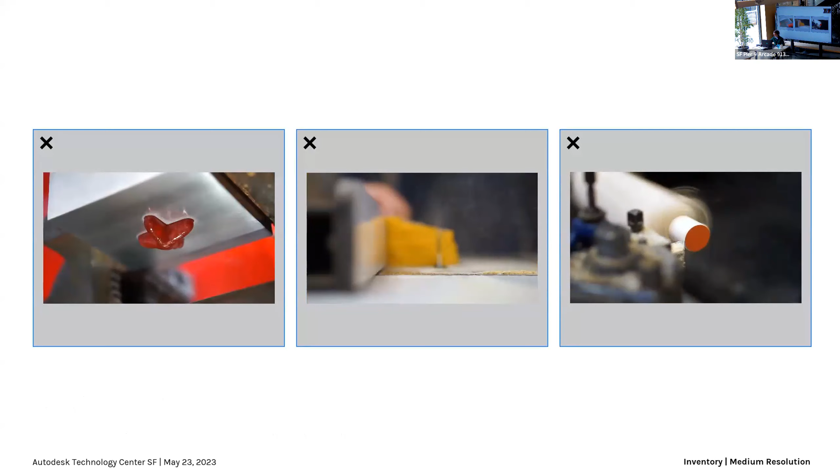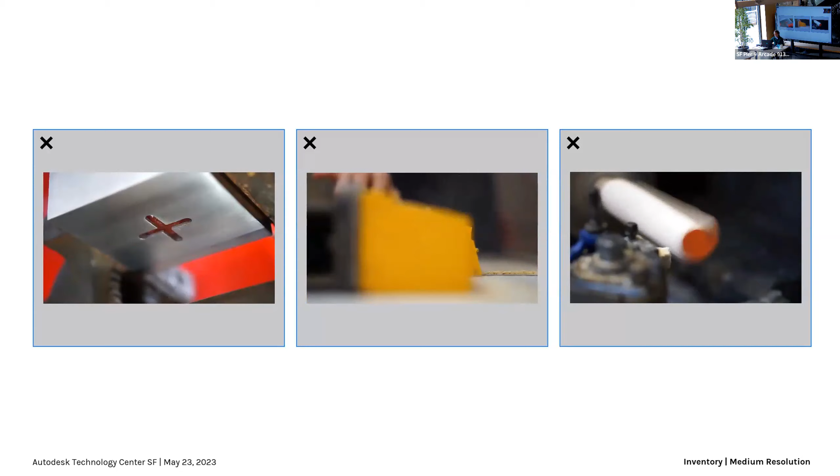Extrude, saw, turn, repeat. During the Industrial Revolution, machines and techniques were invented and advanced for forming materials into standardized shapes. This would lead to the development of the industrially mass-produced standardized building materials used today and left an indelible mark on architectural thought. The architecture of modernism, especially the international style, embodied the logic and efficiency of the factory.

While the endless linear and rotational processes of industrial production were quite literally imprinted on its geometries, to an unprecedented degree architecture became a practice of blind trust in superficially dimensioned materials, meaning standardized materials, specified from afar.

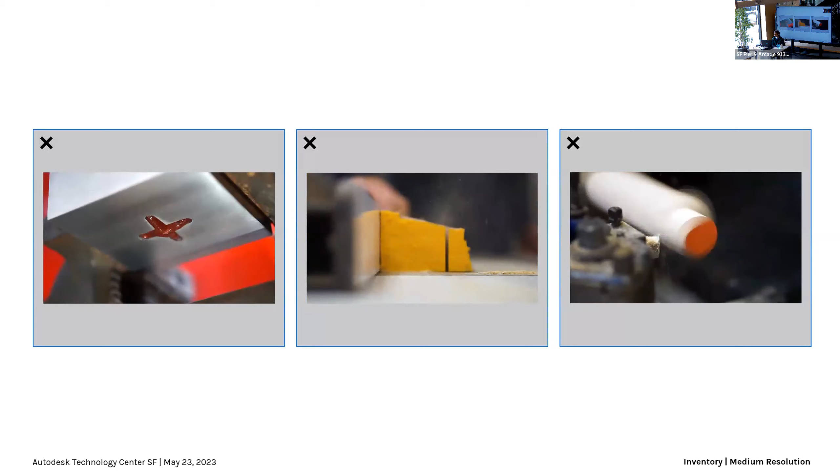Extrude, trim, revolve, array. This intertwining of mass manufacturing and architecture has only intensified over time, finding its way into the tools of the architect. The 3D modeling software used by the architect and designers more generally contains analogues to the machine processes and abundances of industrial production.

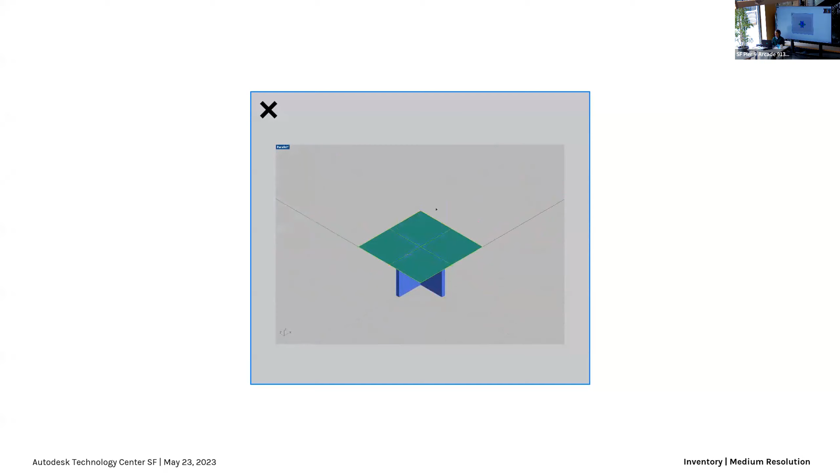By instantiating geometry that was not there before, with minimal apparent effort or cost, such software obscures the extraction, processing, transportation, and waste necessary to physically realize said geometry, and suggests that the only limit on the material world is computer processing power and memory.

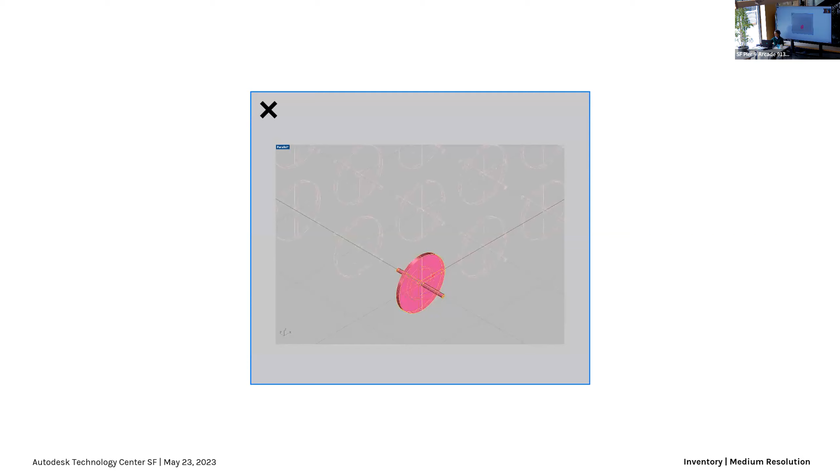This poses a challenge as it becomes increasingly apparent that circular approaches are key to minimizing the deleterious environmental impacts of construction, both in terms of greenhouse gas emissions and waste. Given architecture's proclivity towards the standard, how might these increasingly urgent pressures make their own mark on architectural thought and design?

Rather than operating solely with the mindset of material predictability under an industrialized global supply chain, architects and designers must also learn to accommodate materials as they come.

In order to adapt to material irregularities, which are inherent to a non-standard material palette, various 3D scanning techniques have been adopted to produce digital representations of materials, which can then be manipulated in 3D modeling software to derive digitally informed fabrication and assembly processes.

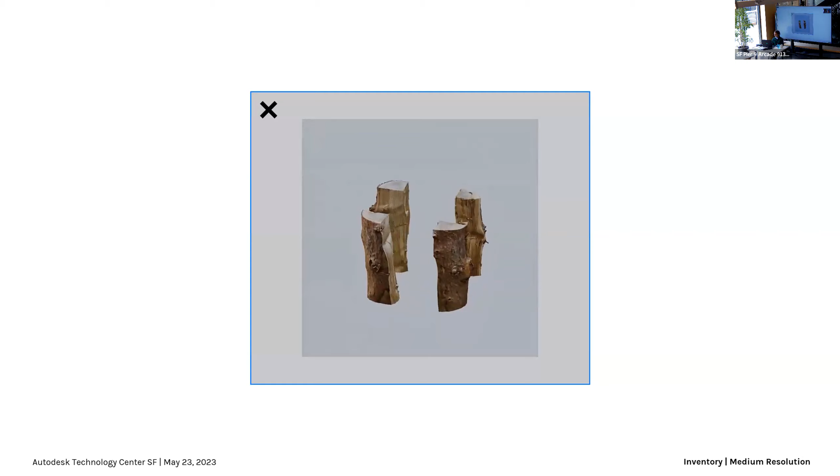By the nature of their discrete sampling, however, these representations vary in their precision. What the designer encounters in the 3D modeling software is not the material itself in its infinite specificities with its weight, its moisture content, and smell, but rather a surface representation, or a mesh, composed of a large but finite set of points.

These representations inhabit the space between the low resolution of pure geometric abstraction and the high resolution of physical phenomena, and therefore might be called medium resolution.

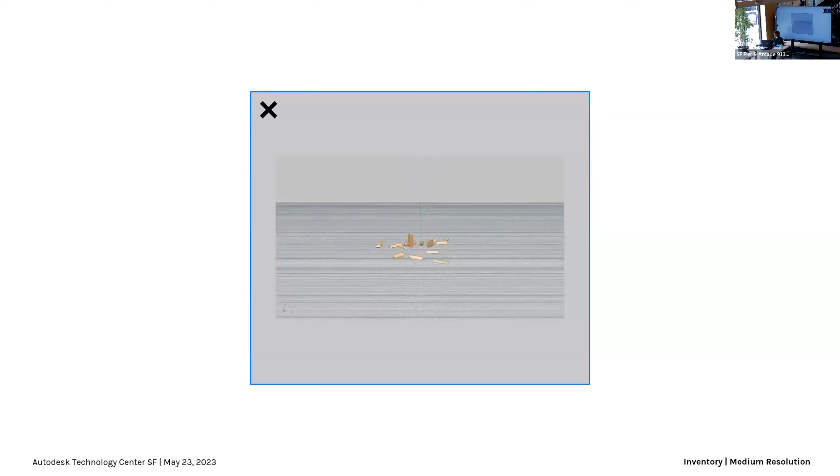If there exists a deeply ingrained connection between 3D modeling software used by the architect and the processes of industrial mass production, then in order to overcome the cognitive grasp of the standardized material palette, the 3D modeling software itself must be reconsidered. In general, 3D modeling software allows the designer to create and then alter a geometric representation.

Though the geometry in a 3D modeling environment always references future actions and energy inputs upon construction, shape itself does not suggest process. Digitally, a sphere Boolean from a cube suggests a process of removal. Physically, this shape might be fabricated using an additive process, like 3D printing. As I demonstrated a couple slides ago, in CAD software we often operate through analogy, constructing geometry with digital operations that reference physical ways of making.

But generally speaking, we rely on the contextual understanding of the designer or feedback from simulations to implement those operations in logical ways as far as manufacturing and fabrication are concerned.

The research I'm presenting offers an alternative to contemporary CAD software, where the gap between digital models and physical constraints is vast. Rather than abstract commands that project forth a not-yet-existing material condition, the software I'll be presenting, which is called Inventory, is based on digital representations of materials and processes from the physical world. Inventory is CAD for this medium resolution paradigm.

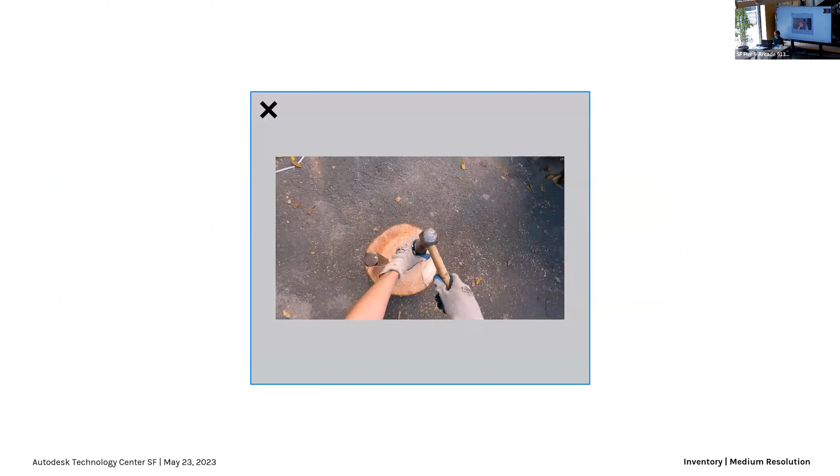Minimal processing of the stock through splitting limits material waste and energy input, preserves the structural integrity of the wood's grain, and reduces distortion as the wood dries.

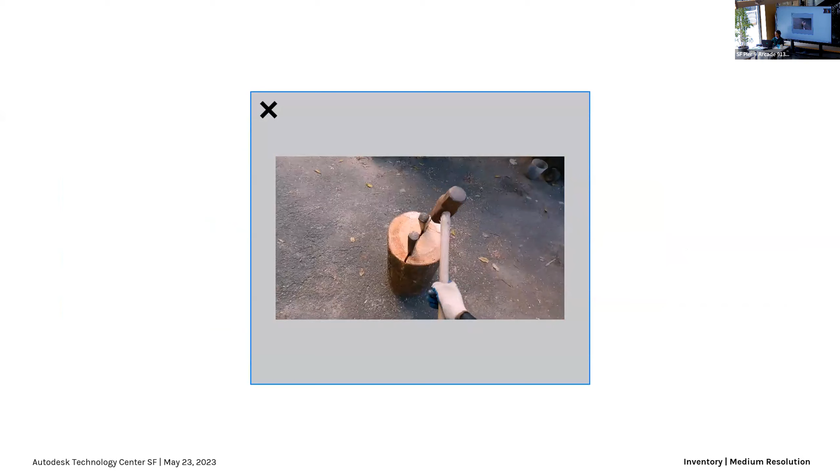Once standard practice for producing all kinds of building materials, from structural members to roofing shakes, wood splitting today has been relegated to firewood production alone. However, the technique finds new relevance in this medium resolution paradigm, where producing planarity through further processing of the stock offers no benefit.

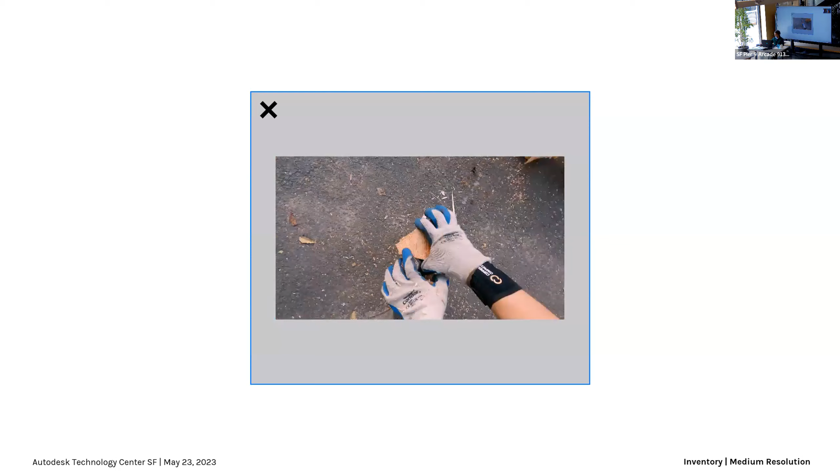Inventory understands the built environment as a temporary configuration of materials in motion. Therefore, processing doesn't increase the value of a piece of material, rather only limits its potential for further use. Stock may be taken up into an assembly one day and returned to the inventory the next.

The parts inventory contains representations of specific pieces of material that can be added to the modeling environment. Parts are unique mesh representations imported from the physical environment to the digital using photogrammetry.

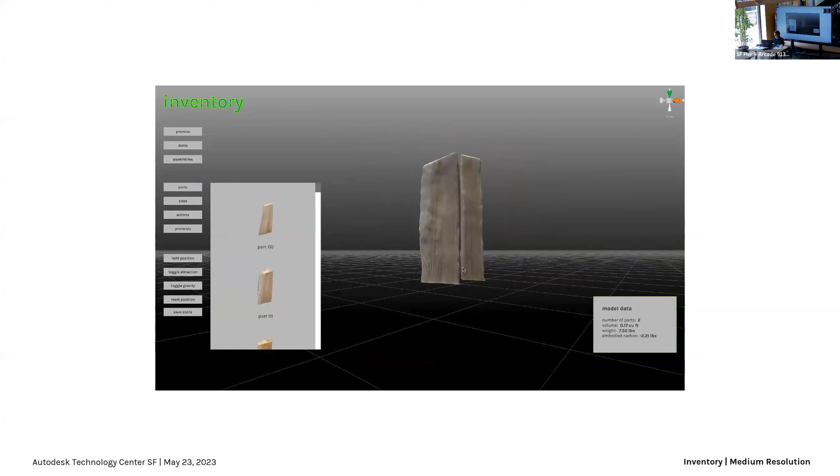In inventory, there's no object snapping. Rather, objects collide and settle into one another. There's no coplanarity, only closeness. No aligning to the XY plane, only gravity.

Sites are mesh representations of physical locations. In the medium resolution paradigm, there's no distinction between the representation of parts and of sites. Both are meshes. The site is not the place where something is to be built or where materials are to be assembled. Instead, it is understood to be part of the assembly itself.

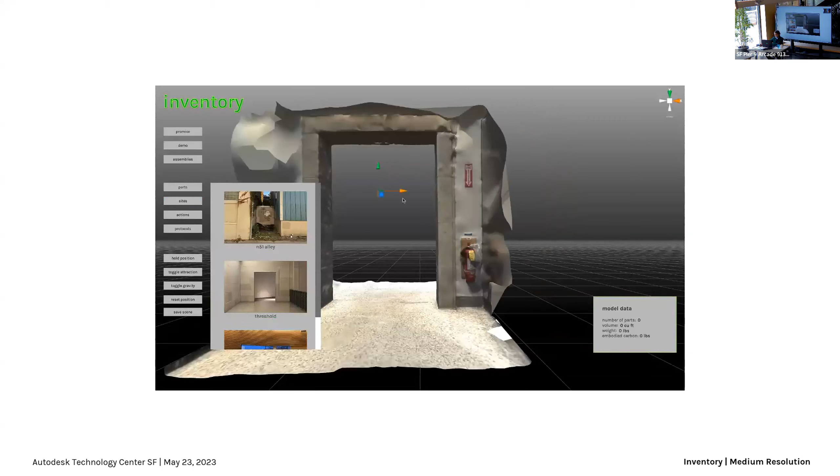Actions are digital abstractions of physical operations made on parts. Dowel part, for instance, refers to making a hole in a piece of stock using a 6-axis operation in order to receive a dowel. Add wax refers to adding a piece of polycaprolactone wax, a reusable bioplastic, between two pieces of stock.

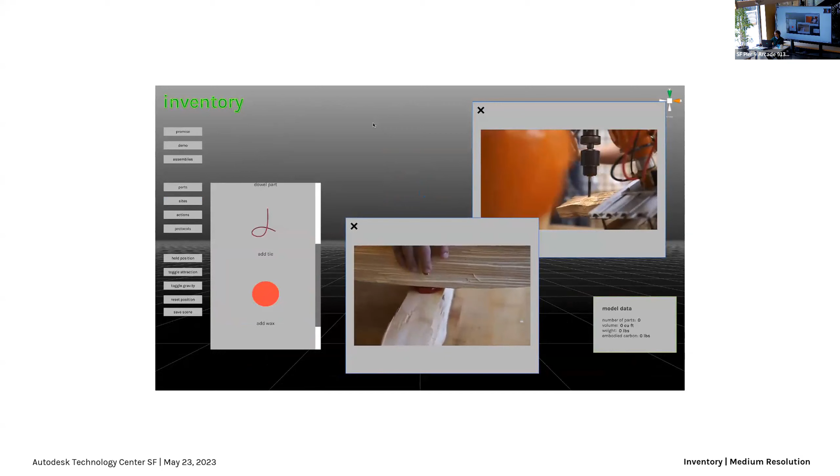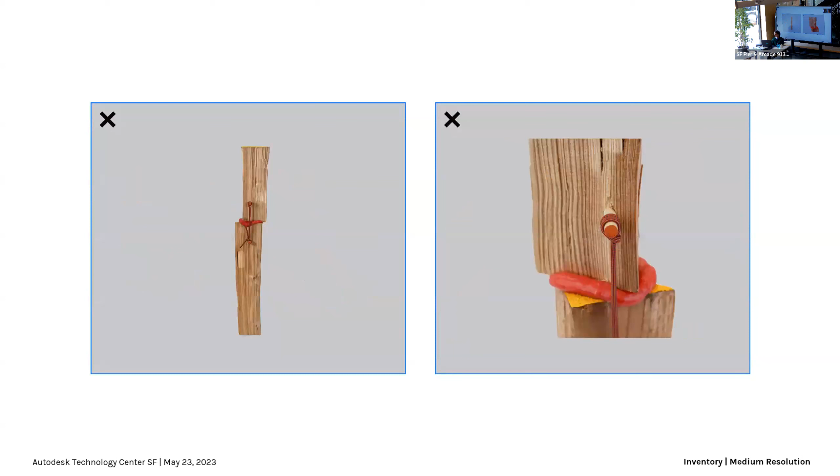These actions were developed through a series of physical prototypes, an observation of the constraints that pieces of stock, dowels, polycaprolactone wax, and rope put on one another in various configurations in order to join parts.

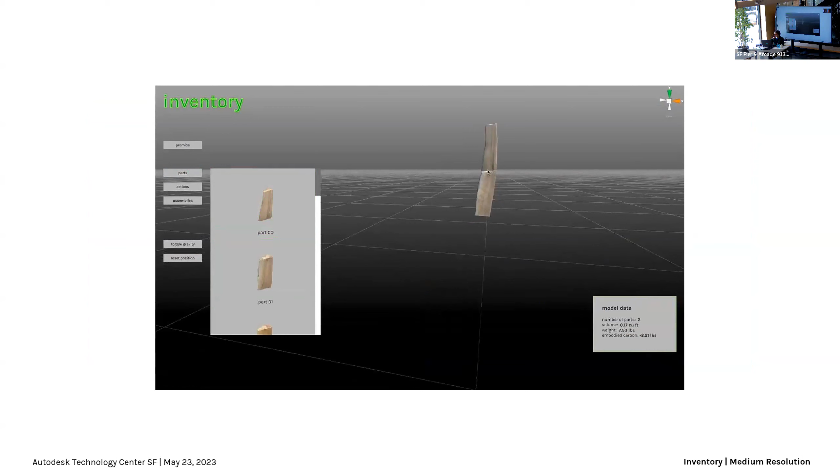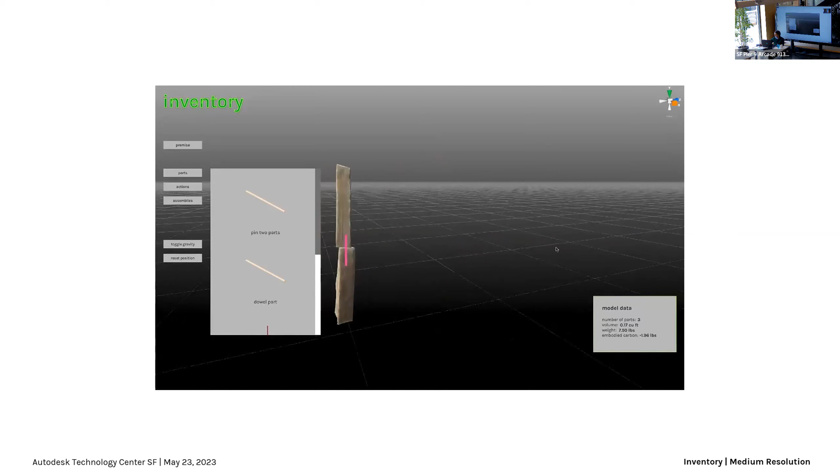Once physical joining methods were developed, they were abstracted into digital actions. Practically speaking, these actions applied joints to rigid bodies using the Unity physics engine. Pin 2 parts, for example, asks the user to select 2 parts and add a pin, representing a wooden dowel between them. If the z-axis is understood to be along the length of the pin, then once the joint has been activated, it restricts motion between parts in the xy plane and rotation around the x and y axes, but allows rotation around and movement along the z-axis.

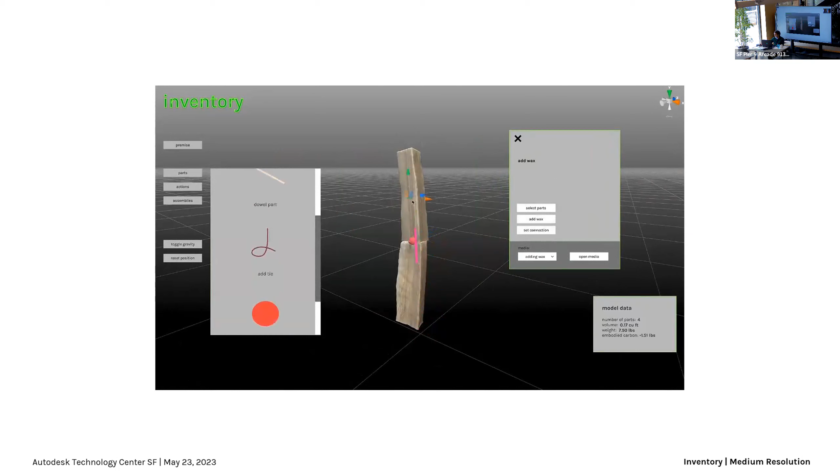In order to restrict rotation around the pin, or the z-axis, the user might select the add wax action, which is an abstraction of smushing polycaprolactone wax between parts. The polycaprolactone wax is not an adhesive, but by gripping onto the irregular surface of the stock, it restricts rotation between parts.

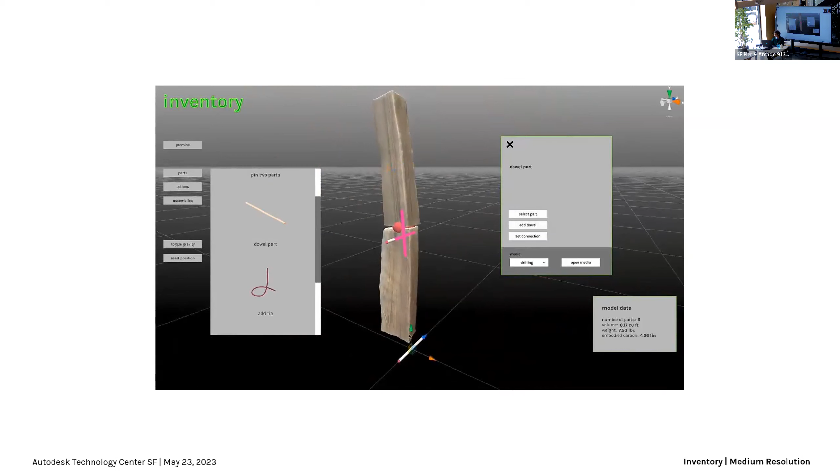In order to restrict translation along the z-axis and fully constrain the joint, the add tie action could be implemented. First, dowels would be added to each of the pieces of stock, roughly perpendicular to the initial pin, or the z-axis. And ties would be added between them. So this offers just one example of various ways in which several actions can be combined to create fully constrained joints.

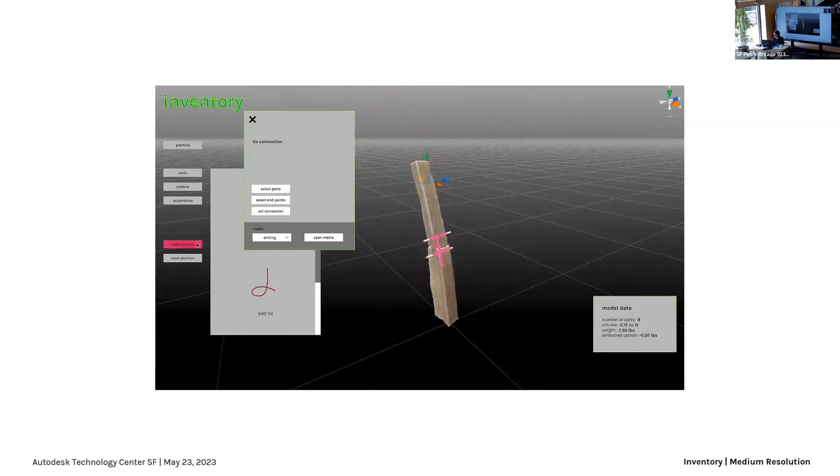Like the geometric representations of materials contained within inventory, these digital actions might also be called medium resolution. They are not the actions themselves, but representations that extract their essential function in constraining rigid bodies.

And so here we see that modeled joint. And just to make a note about the wax, because it's sort of key here, which is that because these scans are medium resolution, and in the case of this project, they're not super high quality scans, where the surface of a piece of material actually falls is sort of in a range rather than a known value, and so the wax serves as the interface between parts and kind of soaks up that tolerance.

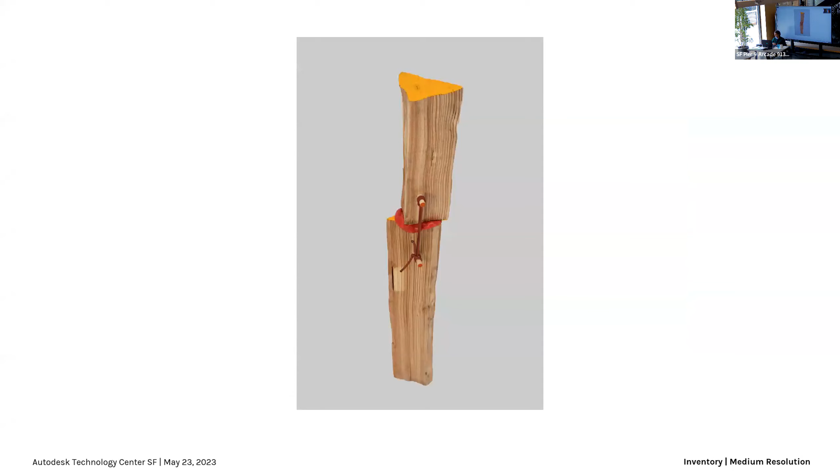In addition to placing parts one by one, protocols may be used to algorithmically determine patterns of interaction between parts. Parts are assigned anchor points that determine points of attraction, and distance constraints are applied, pulling them together. In these examples, the form of the assembly is determined by the unrelenting drive of the parts to be close to one another. With these protocols, we can see how this project takes advantage of physics simulations at multiple scales.

Previously, I showed the modeling of a joint where rigid body collisions and various axial constraints were used to join one part to the next. With the protocols, attraction forces are used to organize many parts.

Given a large number of irregular pieces of material, rather than having to place each part one by one and ensure that no piece overlaps the next, rigid body collisions and attraction forces set in motion these animated assemblies, which in some way organize themselves.

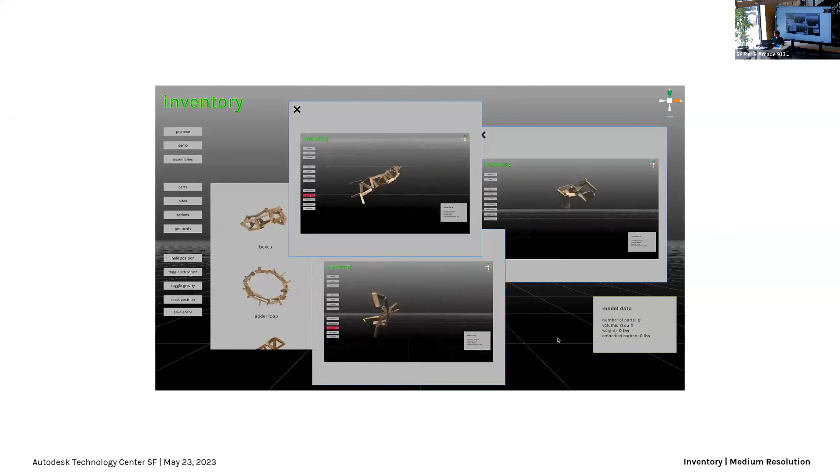In addition to attraction forces between parts, sites may also be assigned anchor points, creating site-specific assemblies.

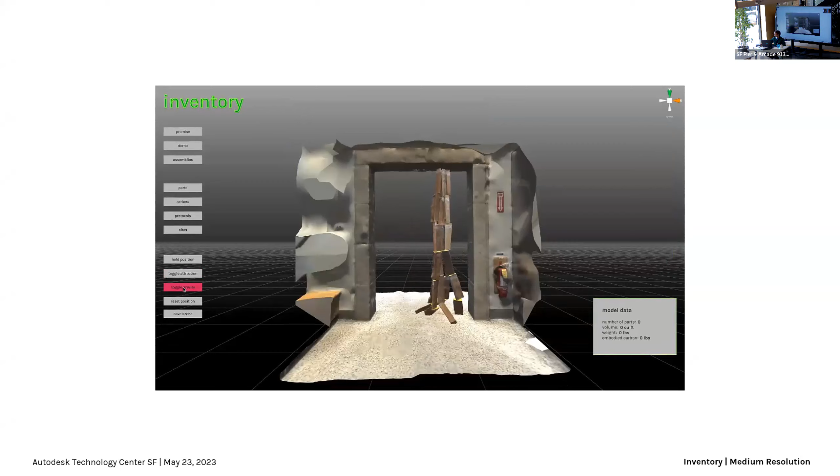Once a given organization has been achieved by a protocol, actions may be used to fix the position of parts relative to one another and the assembly fabricated. The physical actions that were abstracted into inventory can become physically real, now choreographed by the information contained within the software.

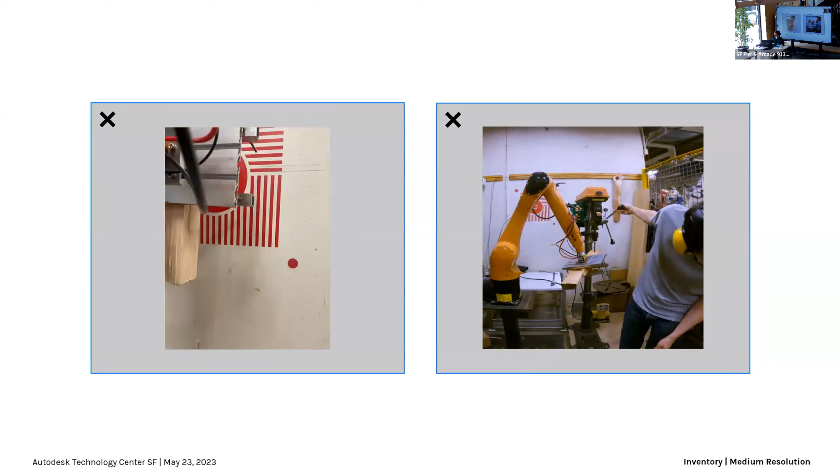In this preliminary phase of the research, the geometry modeled in inventory was exported to a secondary set of software tools for robot path planning, but a potential next step for the project would be to integrate those robot controls within inventory in order to more fully realize it as an interface between the designer and the physical world.

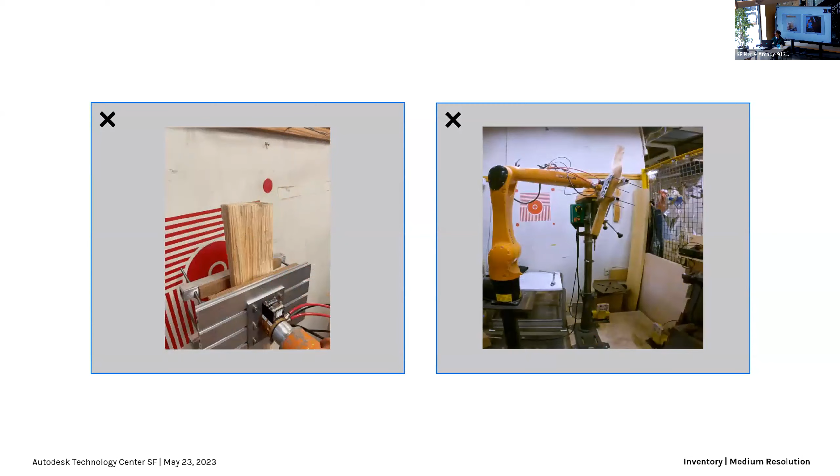The goal would be that inventory takes information about pieces of material as an input and outputs information about how to alter that material to build assemblies of parts.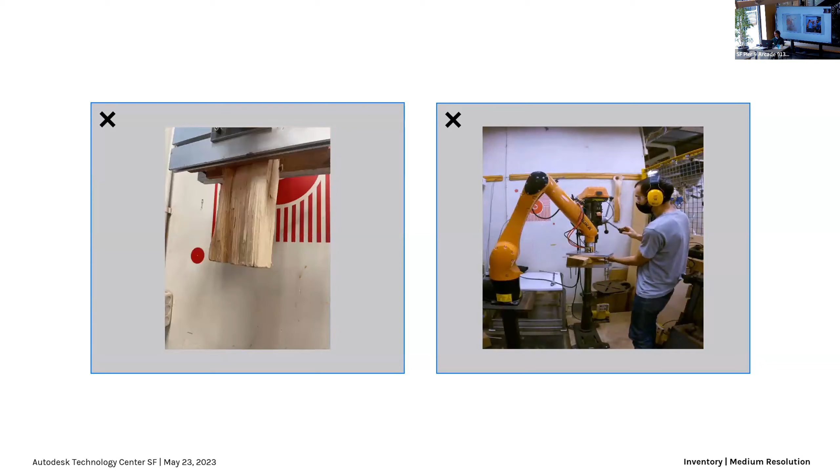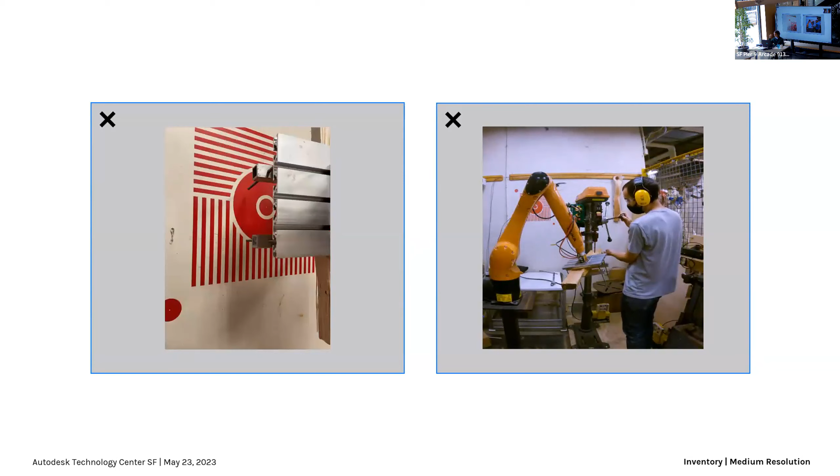So just to briefly describe the fabrication workflow, a somewhat rudimentary clamping end effector was designed that could hold irregularly shaped pieces of wood. Once a piece of wood is attached to the robot arm, a secondary photogrammetry scan is performed in order to understand the location of a piece of wood relative to the robot coordinate system. So this is what you're seeing on the left.

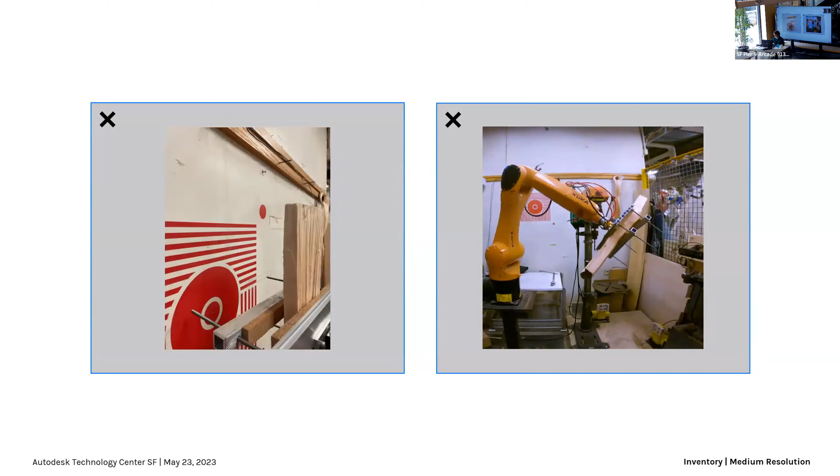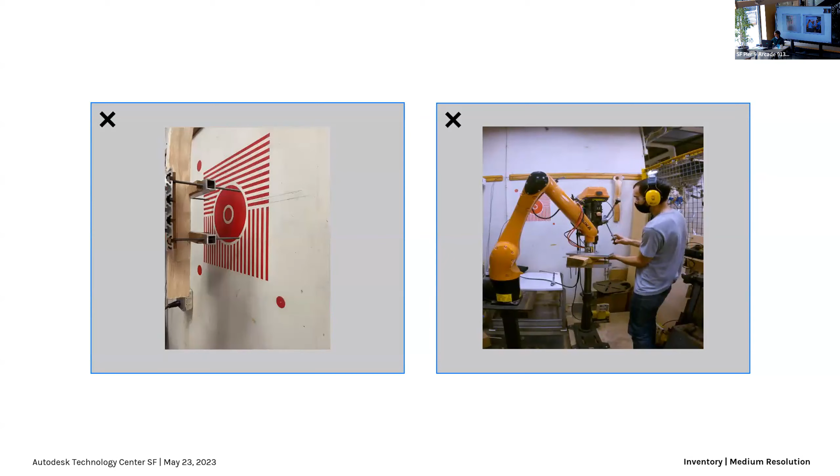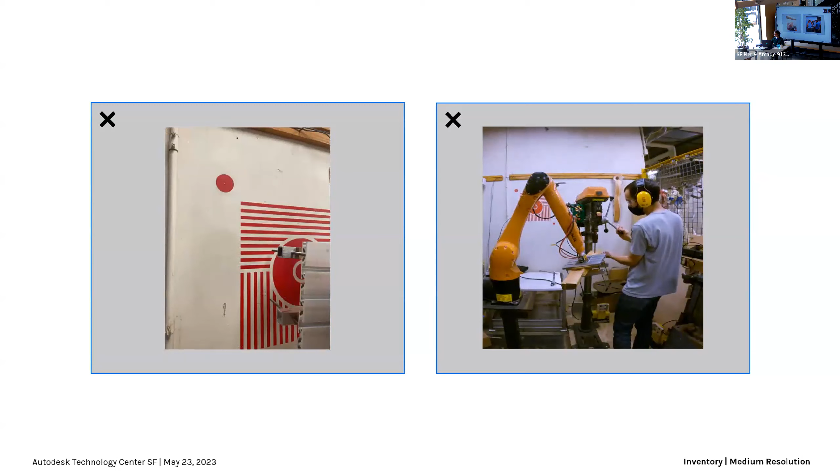So if that red target is at a known location relative to the robot, and if you make a scan that includes that target, then you can coordinate the wood space with the robot space. And as you see on the right, I have a drill press set up in the robot cell. So the job of the robot was just to accurately position the wood relative to the axis of the drill bit. And then I would go in and manually lower the drill press to make the holes.

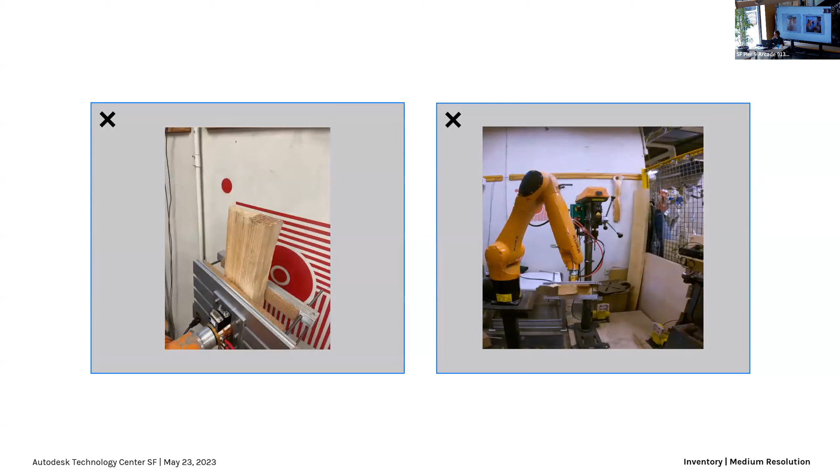And drilling was chosen as the main operation to alter parts because it's sort of minimally invasive and extends the reusability of pieces of material.

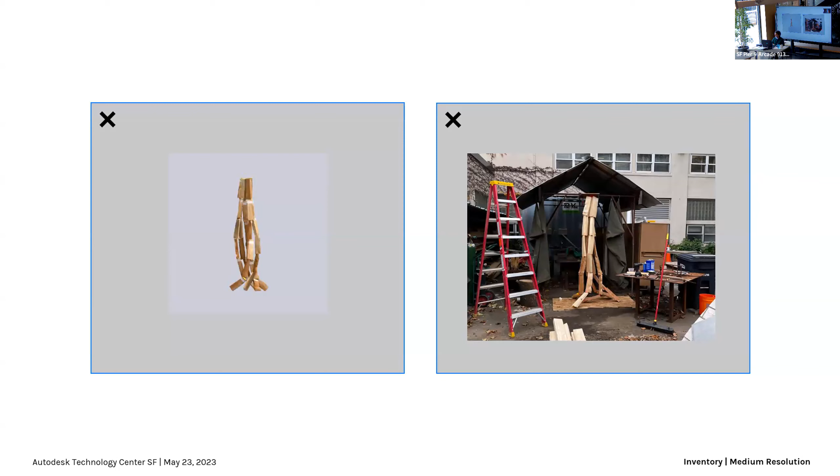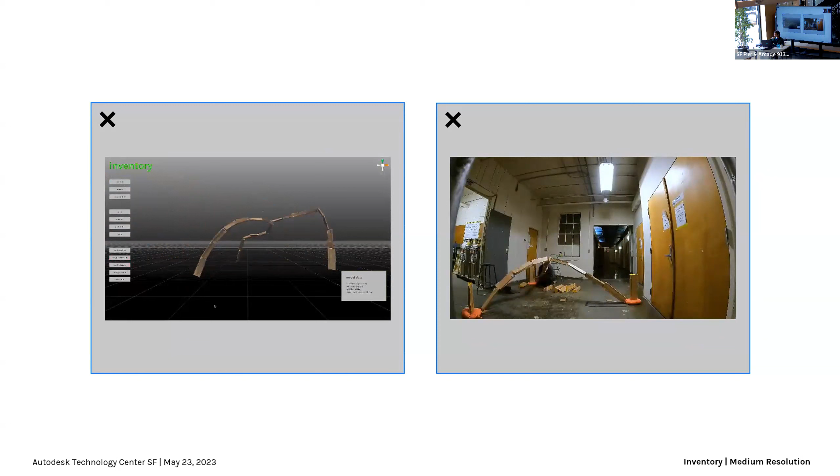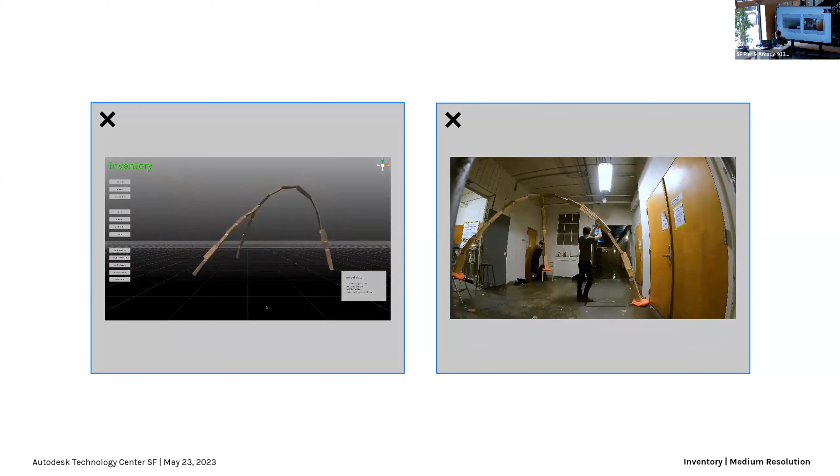When there is no longer a need for a given assembly, or if a structural failure occurs, the parts can be returned to the inventory. However, these are no longer the parts in their original state, and embedded with them are the information and scars from their prior use.

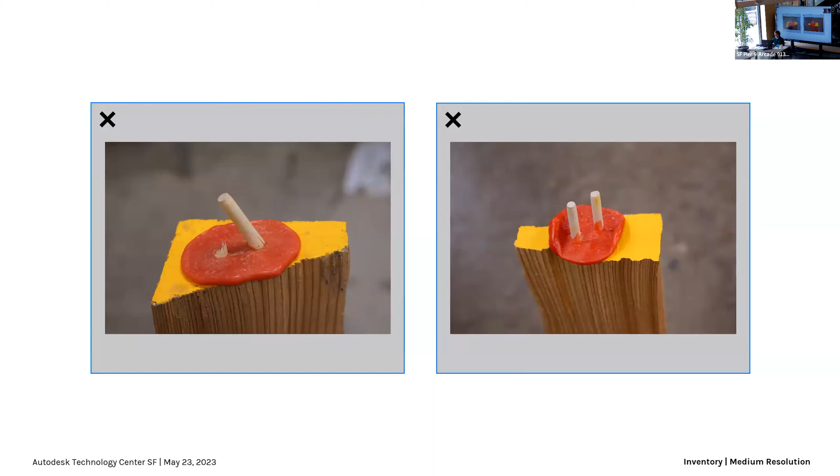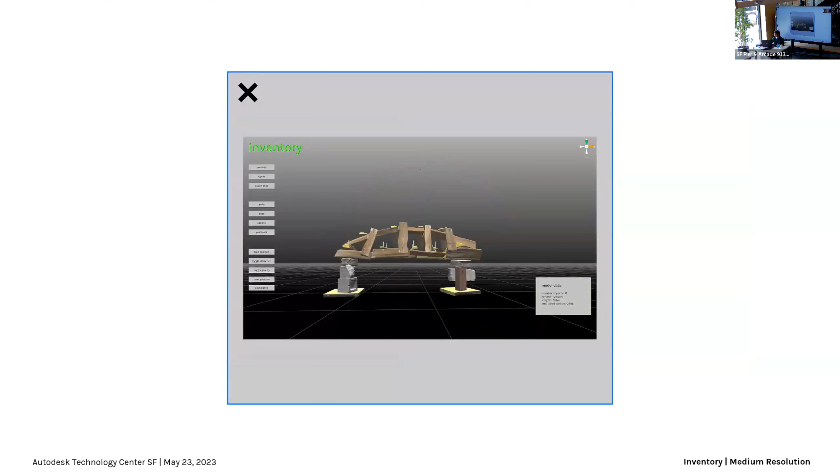This information can then be used to drive a future assembly within inventory. For example, the broken components might be removed from the assembly and new connections made based on the intact pin connections. The broken components can then be reintroduced as bracing in this example.

So to wrap up, what the project offers is a proposal for how to design. Inventory composes architecture, or architectural elements at least, through the interaction of parts, sites, actions, and protocols. Each category is made up of digital abstractions of physical phenomena that encode and make apparent their physical impact.

Rather than the model-forward practice of design that dominates today, which is predicated on trust in the availability of standard materials, inventory establishes a dialogue between physical material conditions and digital models. In inventory, design and construction are not a one-way stream of information and materials ending as a file in a computer's trash and a 2x4 in a landfill.

It's not that our world should look like these prototypes or be made from these materials in particular. Instead, it is about disentangling ourselves from the standardized material palette and our reliance on the predictable surface, which has become deeply entrenched in both how we design and in wasteful construction practices.

Inventory peels back some of the layers of abstraction authored into contemporary CAD software to allow the designer to be more specific and explicit about their interaction with the physical world. As an open-ended platform for design, this research anticipates the expansion of each of the inventories to accommodate a greater diversity of materials or parts, places or sites, fabrication processes or actions, and algorithmic design strategies or protocols. Thanks.

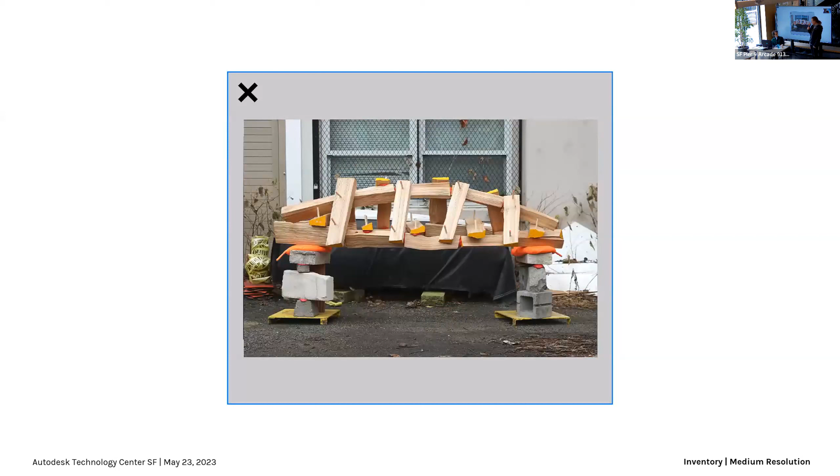Can you talk a little bit about your transition from exploring these themes in academia to exploring them in industry with Duality? Was there a link? Did you find there was a strong link? Did any of that prepare you for what you would face in applying this to industry?

Yeah, I think that was where my interest in working for Duality came from in the first place — this idea of using digital twins to work on something, or strategies that people are using for entertainment in the metaverse, but applying them to real building projects essentially. Duality doesn't work on construction in particular, but the conceptual underpinnings are similar. Beyond that, just having worked with photogrammetry a fair amount has been super relevant to what we're doing here specifically.

So for the people online and the people that don't know, could you briefly touch on what your focus is at Duality? Duality's developed two prototypes here, we built them in the shop. Basically it's a machine that does photogrammetry. We have a turntable and an arm that pivots around the turntable, and you can set a product on the turntable. It's made out of acrylic or glass, so it's see-through, so you can take pictures 360 degrees all the way around, and then reconstruct a 3D model.